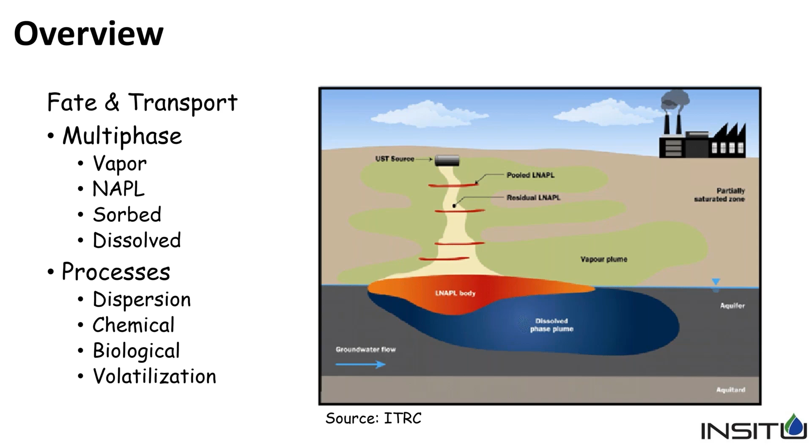Today we'll look at all 4 briefly at this site and how they were handled, but mostly focus on the dissolved phase. Things we have to think about when designing remedial programs, of course, are dispersion, chemical degradation, biological degradation, and volatilization if we have a lot of vadose zone to consider. One of the things you really need to understand when it comes to LNAPL and BTEX hydrocarbon plumes is the release of the LNAPL to the groundwater.

This is just once again from the ITRC and just shows how LNAPL, when it's released, how it accumulates at the water table and how you can have 3 different phases present. So if we go left to right here, basically you're having the LNAPL released, and then you're seeing the 3 phases form: the sorbed, the LNAPL itself, and then the water and the air.

So as it goes down, you get saturation of the soil with the LNAPL, and if you have enough, you get it accumulating on the water table. Now, over time, the LNAPL thickness will vary with the fluctuating water table, and what you get is, most people call it a smear zone forming. This can be very problematic from a remediation point of view, especially for deep remediation.

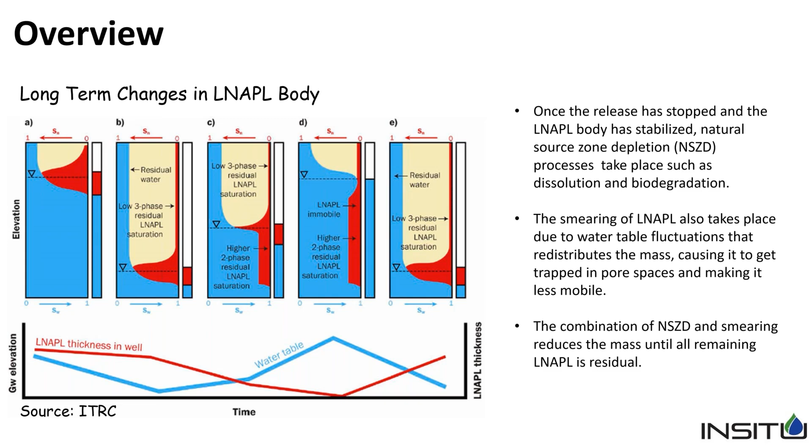So the other thing is how do we understand what we see in wells? Usually LNAPL is detected in wells. There are high resolution techniques out there like the UVOST and the technologies out there that can detect NAPL in the soil in the vadose zone, but usually NAPL is usually detected by presence in wells.

And how do you interpret that presence in wells with what you have to remediate? So you have to look at the different stages. We're not going to get into this, but it's something that when it comes to remediation, a lot of people forget some of these basic steps and understanding the conceptual model in the flow and transport of NAPL and the associated dissolved plumes, as well as the vadose zone plumes. So this is just a reminder, and once again, I strongly recommend you look at documents like the ITRC documents.

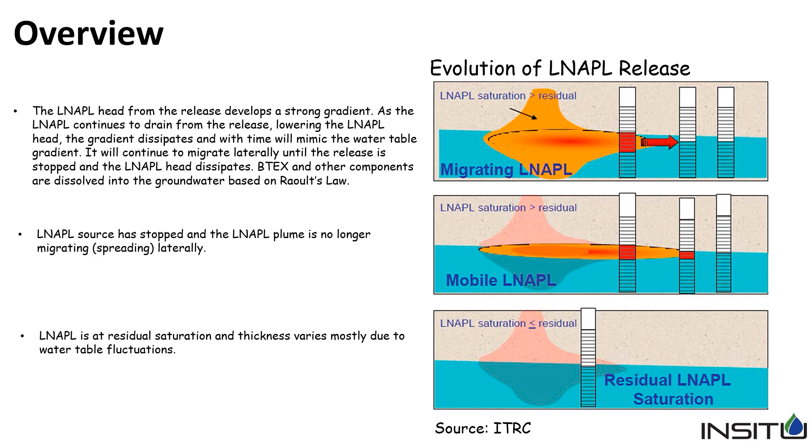So we'll get right into the site. It's an active gas station with multiple underground storage tanks. It has been in operation for over 30 years. And interestingly, the owner of the station does a leak test every so often. And the leak tests have always come back, quote unquote, passed, suggesting there's no leakage of the tanks. Unfortunately, somewhere along the line, the data in the LNAPL in the ground doesn't agree with the results of the leak testing.

So it's once again a little bit of a warning that leak testing do have, I call it, a detection limit, like most things. And that detection limit allows for a certain percentage of gasoline or diesel or hydrocarbons to be released without the system actually triggering any warning. So you need to be careful about that. And like most data, just take it with a grain of salt.

So the site itself is a 70-foot thick vadose zone consisting of sand to a very dense sand as you go down. Now it is heterogeneous with layers of higher hydraulic conductivity in that. So our hydraulic conductivity varies from about 1 times 10 to -3 to 9 times 10 to -4. So it's very quote unquote homogeneous.

However, these are bulk hydraulic conductivities and it doesn't really take into account finer or coarser grain or higher and lower conductivity sand seams or silt seams that may exist. It is a glacial fluvial deposit, so what we would call an esker. So it is fairly permeable and groundwater flows at a moderate velocity of about 30 feet per year. It is unconfined. As you would expect in a hydrocarbon plume, it is iron and sulfate reducing, and this aquifer is buffered quite well with carbonates.

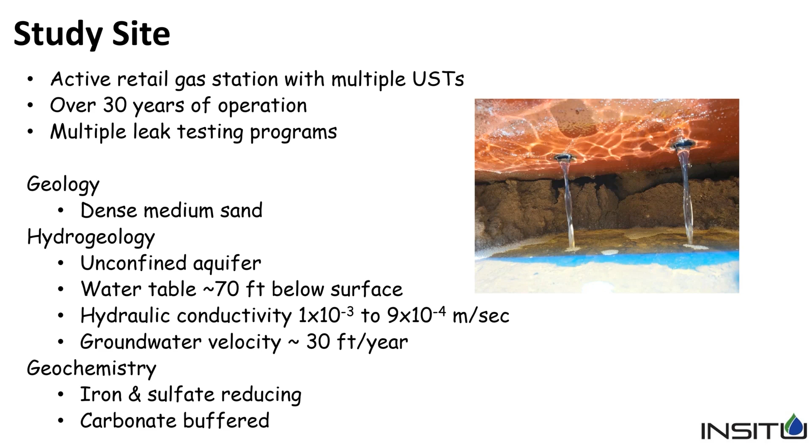Our chemistry, this sums it up now. This is the worst case chemistry for the hydrocarbons. And as you can guess, they're basically samples taken almost immediately down gradient of NAPL. So we have BTEX at about 122,000 micrograms per liter with the gas range 154,000 micrograms per liter, diesel range about 3,700 micrograms per liter.

And of course, we have some of the PAHs associated with this. We had a fair bit of naphthalene present. We'll talk about that a bit later as the University of Toronto PhD student there did a lot of research on looking at the naphthalene mobility at this site.

Inorganics, these are within the core of the plume itself. So really we have no electron acceptors in the core, which you would expect. We have very low iron in our core, which is a bit of a surprise, but this is a nice clean sand with very few iron deposits or iron coatings on the soil itself. So that's not surprising, but you'll see we do have some manganese hanging around.

Prior to remediation, we did have some methane occurring in the groundwater up to 1 milligram per liter, so fairly good concentrations. And as I said before, our groundwater is well buffered at about 6.8 to 7.2, which you would expect for carbonate buffered aquifers.

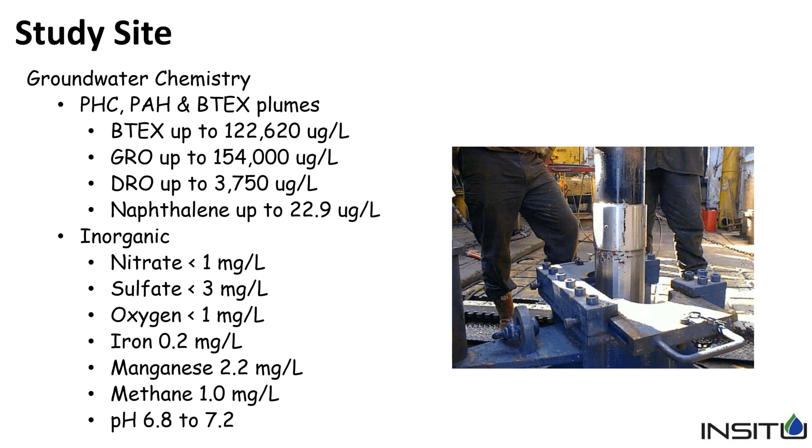So the site history itself is a bit interesting. Prior to us being involved, there was a pump and treat system put in. Not much is known about it. However, we do know it enlarged the smear zone significantly near where the system was.

We know groundwater fluctuates about a meter over the 10 years we've been working on site, and yes, you heard that right, 10 years. But the smear zone near where the pump and treat wells were was almost 3 to 4 meters. So they were doing some significant pumping, but they were smearing a lot of product. We're not quite sure what the objective was, because it really does not appear to have been effective in containing the plume, and it sure wasn't effective in reducing much mass of the plume.

So as we became more involved, there was an MPE system, a multi-phase extraction system, put in, and it removed about 9,500 kilograms of LNAPL. It did a fairly good job, but it got to a point of diminishing returns.

So the next technology brought in was an air sparge SVE system. Remember, we had 70 feet of vadose zone here, and most of that vadose zone was impacted underneath the tank. So we had significant mass within the vadose zone, as well as on the water table itself. Over that operation of about 8 years, they pulled out about 10,500 kilograms of hydrocarbons.

At the end of that, we had removed all the NAPL, except for one small area that had a little bit of NAPL. Access was a bit difficult for the SVE system, so we decided to do a surfactant push-pull flushing test at that area, to address the NAPL in the 1 or 2 wells that still had it.

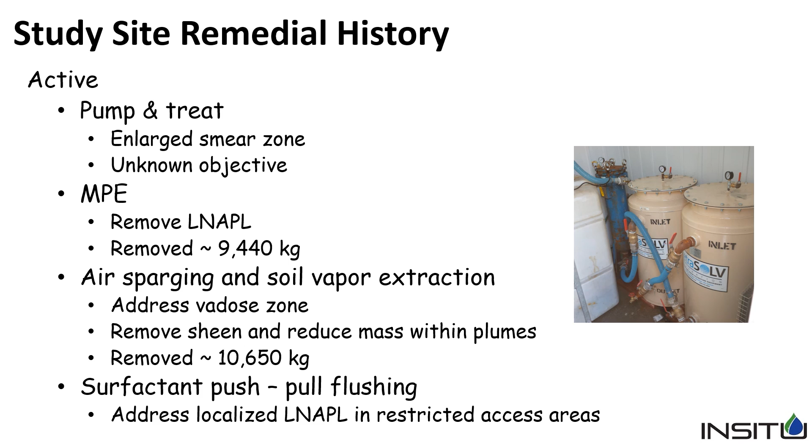And that was very successful in doing that. Basically, we injected a surfactant solution down the wells and then waited about 24 to 48 hours, and we pulled that surfactant-enhanced groundwater back and pumped it to the surface. After that was done, the NAPL was removed.

So we just didn't willy-nilly decide on what technologies to use and when to change them. We actually used an old concept put up by the EPA, probably back in the 90s, where we looked at the cost of contaminant removed on a mass basis and looked at it over time.

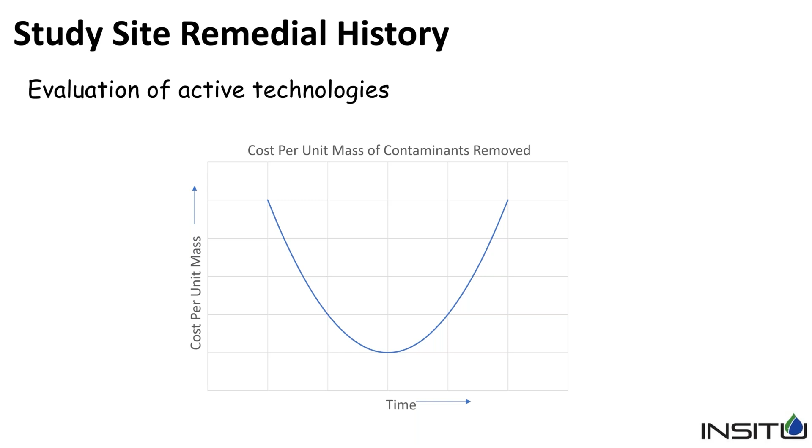What you'll see here is a kind of classic graph. Initially your cost is very expensive, and then as you get more and more efficient and remove more mass, your cost per unit mass decreases until it bottoms out. Then it usually starts to increase as diminishing returns happen. So usually we want to change the technologies, or reevaluate or optimize them, once we start to see that upward curve. This is kind of what we use as a basis for our decision making at the site.

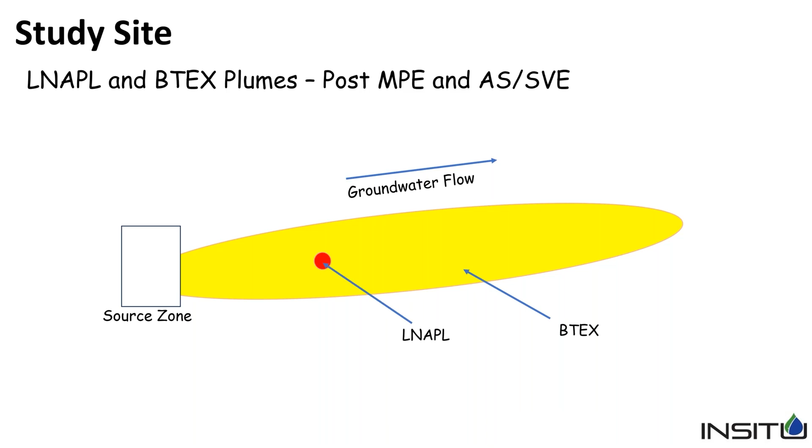So what we're left with was a large BTEX plume, about 400 feet long. At this point, we decided we would go to passive technologies. We looked at 3 different passive technologies. We used enhanced aerobic bio, which consists of using the Waterloo emitters, which release oxygen 24 hours a day, 365 days a year, through diffusion through a tube that's in the ground, and that oxygen diffuses into the groundwater, creating oxygenated water in that area.

It's very passive, but we used it as a plume containment technology. Basically, think of it as a PRB composed of Waterloo emitters. In areas of high dissolved phase, we decided to target those to try to knock down the mass of the hydrocarbons.

Using chemical oxidation, in this case we used activated persulfate or catalyzed persulfate in some cases. We used both, and what we want to do here is reduce the mass within the smear zone as well as within the plume.

Following that, we followed it up with the PetroFix colloidal activated carbon technology, and that was to go after the same areas and basically remove the petroleum hydrocarbon mass within the plume, as well as address any potential back diffusion and matrix diffusion reactions that could happen down the road.

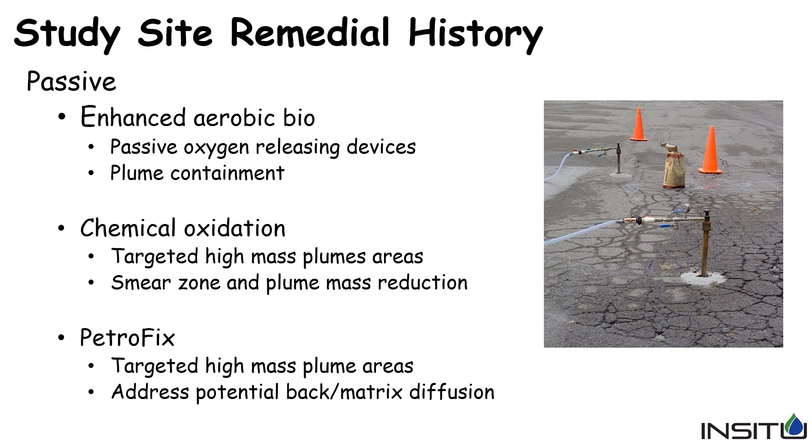So our objectives for the site were: first, evaluate and make sure the PetroFix can work on the high mass flux areas of the plume, the BTEX, the gas, and the diesel plumes, as well as look at the effectiveness of the PetroFix on back diffusion and matrix diffusion that we thought we may see over time, because we did have some fine materials within the overall aquifer.

And finally, and mostly what this talk is about, since we're dealing with high mass flux BTEX and other component plumes in some of these areas, we wanted to look at the effects on the lifespan of the PetroFix, because PetroFix, as Todd will talk about later, is an activated carbon technology that has finite sorption sites. So you could technically overwhelm the carbon if you have too high a mass flux on it over time.

So we wanted to look at what happens if we enhance that. Now, PetroFix already comes as a mixture, or you can customize it yourself, of electron acceptors, but we wanted to enhance those and add more electron acceptors to see if we could reduce the mass flux onto the carbon, and secondly, to see if we could speed up the kinetics of the reactions occurring right at the start, as most clients really want to see results very quickly. So we were looking at that to see if we could do that.

So we divided the site up into 4 field test areas. Each one's about 1,000 square feet in area, and we're targeting the water table and the smear zone.

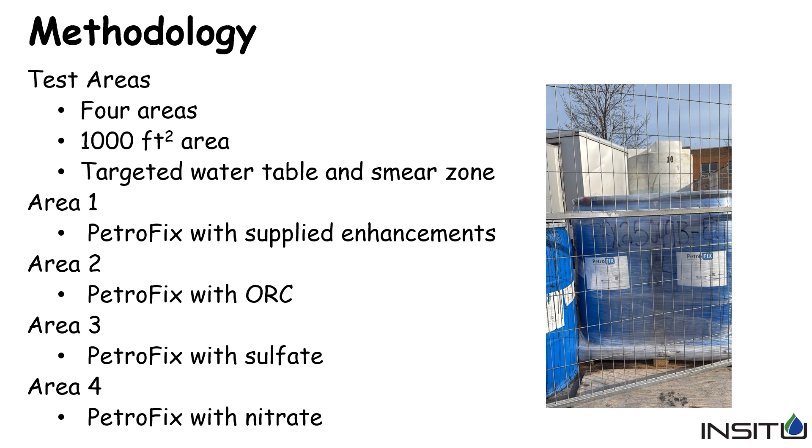This is a classic diagram, but one of the things we're obviously trying to do is enhance the biodegradation of the hydrocarbons, BTEX in particular. Most hydrocarbon plumes have these zones in them, so outside, where not affected, tend to be aerobic, maybe not, depending on the depth of the plume.

As you go through these classic stages of nitrate, iron, manganese reduction, then you get into sulfate reduction and then methanogenesis. Generally speaking, the degradation of the hydrocarbons, the kinetics, increases as it becomes more aerobic. So as you go left to right, those kinetics of hydrocarbon degradation speed up.

So in the ideal world, you would oxygenate most of your hydrocarbon plumes, and that would be great. Unfortunately, oxygen has a solubility limit, and it's consumed by a lot of other electron donors, and it tends to be more expensive on a per-mass basis. So there are different methods to go at it.

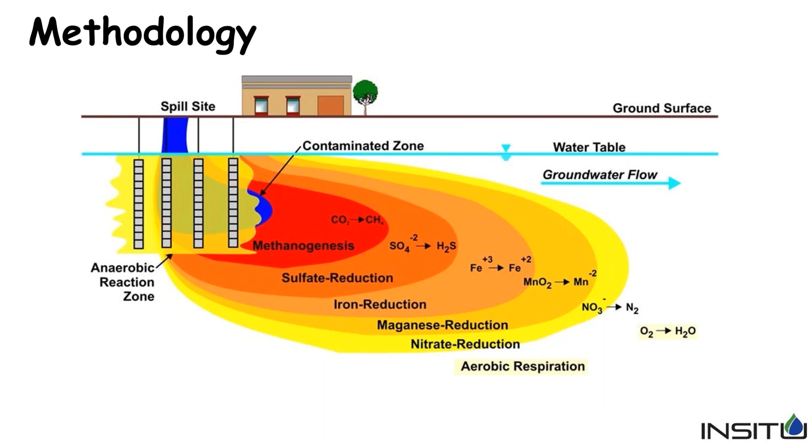So here's the thing of the 4 test areas. You'll see test area 1, where the PetroFix was used, was right near the source, but the LNAPL plume extended down to test area 2 and just stopped upgradient of test area 3. So all 3 of those areas had very high BTEX mass fluxes through it. In test area 4, there was a seam of high conductivity, and it also had a fairly high flux. So we picked these 4 test areas within the core of the plume to do the test.

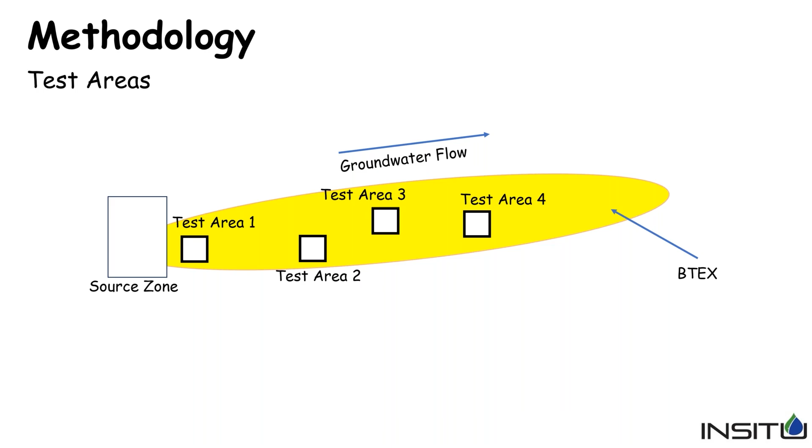So as I said, the first one was done with PetroFix with the Regenesis supplied nitrate sulfate electron acceptors. The PetroFix was injected using direct push technology. Area 2, the PetroFix was enhanced with oxygen releasing compound, and it was once again injected with direct push technology. Area 3 was with 2 forms of sulfate, calcium and sodium sulfate. It was injected in injection wells.

I'll be honest, I was sleeping on this day when I did this design, and we originally went out there with calcium sulfate in the form of gypsum. One of the things is the calcium, the divalent cations can actually - I won't say negatively react with the carrier fluid of the PetroFix, but it breaks it down. So you don't get the transport that you would if you're just using a monovalent cation such as sodium. So we originally started with calcium, and unfortunately we're getting some back pressure in the injection wells, and we switched over to sodium, and that solved the problem. So it's something you need to consider when you're doing design. A lot of people like to use gypsum, but it will potentially, depending on what use you have, negatively impact your distribution of your PetroFix.

Finally, we used a PetroFix with a nitrate salt, and it was injected using a combination of injection wells and direct push technology. You're probably asking why we used 2 different technologies. It's 70 feet deep. We had to get it to about 80 feet, and the dense sand was actually, in some cases, impossible for us to get that depth. So a lot of injection points we had to pre-drill, backfill with a bentonite mixture, and then go back and re-inject. So in some areas, we just decided to put injection wells in. And in one area, we used injection wells on an angle. So that's kind of why we did it.

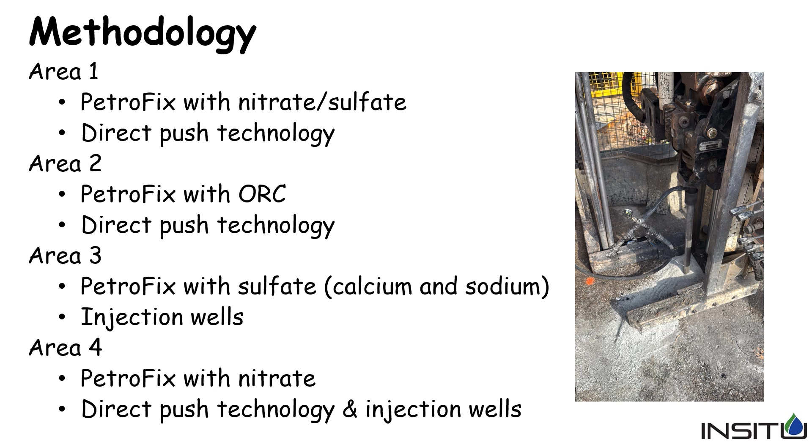So monitoring networks, we are looking at traditional monitoring wells as well as CMTs, which are a multi-level system developed by University of Waterloo, give you excellent vertical delineation of plumes and monitoring. We obviously did the classic organic analysis of gas, diesel range, as well as BTEX. We did a range of inorganic chemistry as well as carbon-specific isotopes, as well as detailed microbiology, which will show some results. And we did obviously water levels and LNAPL presence.

We also took cores of the soil in certain places to look at the modified total organic carbon. Basically allows us to look at concentration of activated carbon before and after injections. We also looked at the FOC of the aquifer - that was kind of a before number. And then we looked at visual cores. Anybody who hasn't used PetroFix or its cousin PlumeStop, both of those are very black, and they cover the aquifer solids very well, and they're very black when you do the injection. So they're visually very easy to actually see if you've injected in the areas you want.

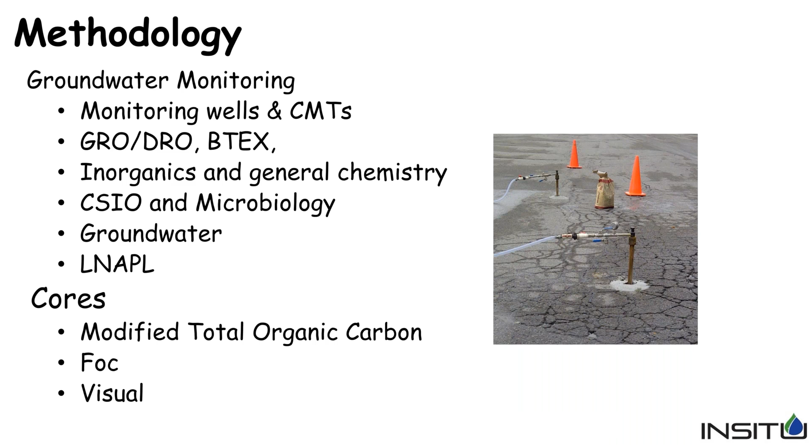So this is the results for area 1. This is PetroFix with its off-the-shelf electron acceptors added to it. Here the groundwater is flowing left to right. Water table, we have what I call a treatment zone here. And you can see this is post-injection. This is - I just picked xylenes. This is a cross-section of the concentrations going into the treatment zone, and then within the treatment zone, down gradient treatment zone. As you can see, we had a plume about 1,000, maybe a little higher, coming into the treatment zone of xylenes.

Basically, right within 30 to 50 centimeters of the up-gradient portion of the treatment zone, xylene went below our guideline, which was 5 micrograms per liter. We had some trace concentrations, but by the time we got out, well within our treatment area, and down gradient after a certain period, concentrations were basically all at detection limits.

We've seen similar results for all the BTEX compounds as well as the gasoline range. Diesel took a little longer to treat, as you would expect.

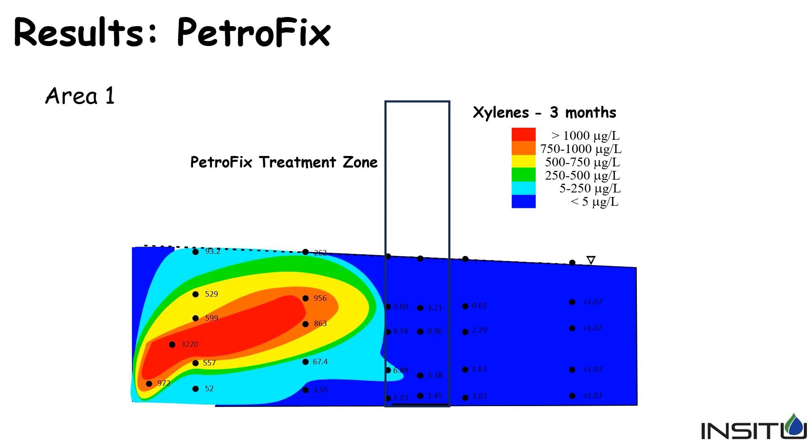When we look at treatment with time, you can see I put the different technologies used on the site following removal of the LNAPL. The air sparge SVE was put in about 17 months into the operation, and what we were seeing was a spike or rebound of the concentrations getting up to over 11,000 micrograms per liter BTEX.

So that's when we implemented the air sparge SVE, and we've seen a nice drop over time, but every time we turned off the system and let it sit for a bit, we would see rebound happening. The rebound was decreasing with time, but it wasn't decreasing fast enough.

So that's when we hit it with the chemox, in this case activated persulfate as well as catalyzed persulfate. We see a nice decrease, but once again over a 3 or 4 month period, we've seen a rebound basically back up to concentrations even greater.

That's when we decided to bring in the PetroFix. Over a 40-month period, we've seen the PetroFix take the concentration of BTEX down to below detection limits, and they've stayed there.

We did see a little blip there. We think that was due to a very high water table at one time that might have picked up something in the vadose zone that hadn't been addressed.

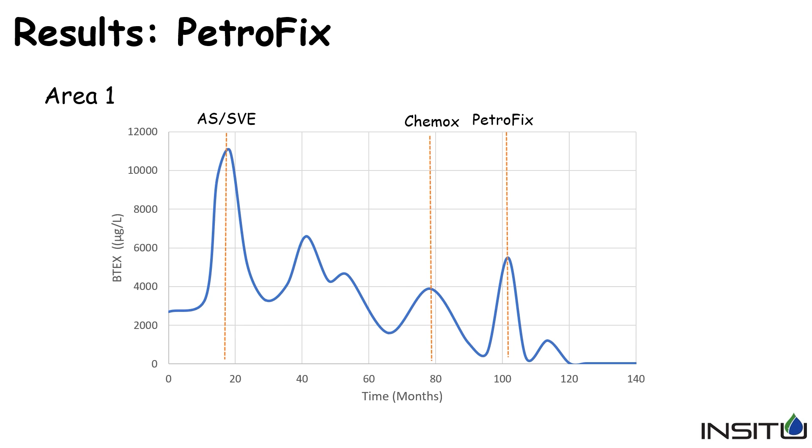For area 2, which is PetroFix with oxygen releasing compound added, here's a similar plot. I picked dissolved oxygen because we were actually adding ORC.

Oxygen coming into the treatment zone is pretty much near detection limit, except near the surface where we're getting oxygenated water through infiltration. Overall, concentrations are basically 3 milligrams per liter or less, and occasionally we see higher ones, which might be residue from the air sparge system that was there previously.

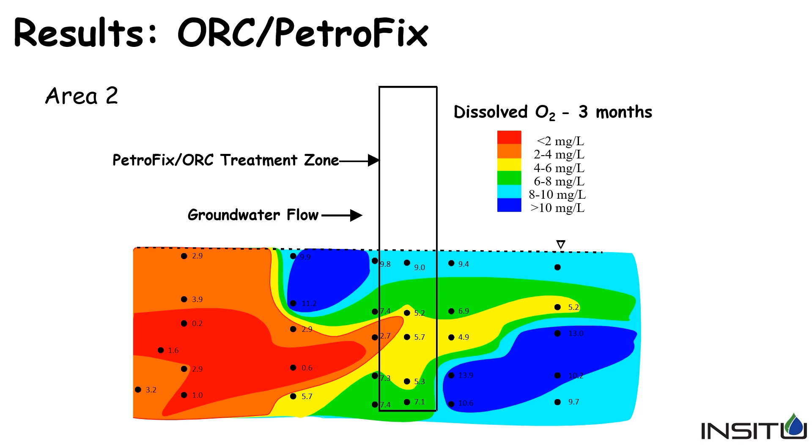Once again, this is just a plot showing treatment with time with the treatment technologies on there. Air sparge, once again, was good at knocking down the concentrations from about 5,300 down to less than 1,000, but then we had a rebound back up to about 2,000.

That's where we hit it with the catalyzed persulfate, and we've seen a decrease, about 50%, but then it bounced up again, similar to area 1, where the chemox rebound was greater than it actually was initially.

So that's when we went in with the PetroFix and ORC, and really the first sampling event after we hit the ORC was below detection limit, and it stayed at detection limit for the next basically 55 months.

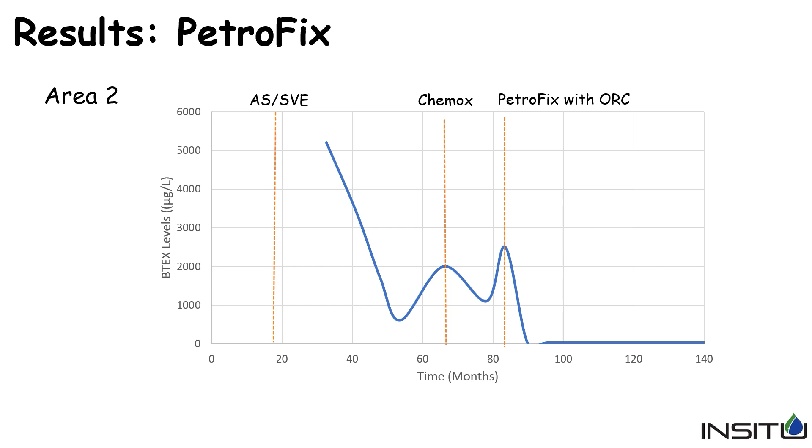So that was great. The ORC looked like it responded very quickly, and it has maintained its non-detect for over 3 years now. Once again, we did a similar type of microbiological analysis.

Once we get to area 3, this is where we added sulfate. Sulfate is a common additive for a lot of people because it has the advantage of very high solubility. It's slower reacting, and therefore it should last a lot longer than things like oxygen and nitrate within the ground. The downside of using sulfate is that it has limited compounds that will degrade or create conditions that allow biodegradation, as well as having a slower kinetic reaction compared to nitrate or oxygen.

So once again, we have the 3 technologies here, and you can see the same pattern. The air sparge knocked things down from about 15,000 down to about 3,000 micrograms per liter. Then we started to see a rebound again, so we hit it with chemox and it went down. But once again, we've seen that same type of rebound with the chemox that we've seen at the other 2 areas, where it came back up to greater concentrations - not much, but basically the same or greater than before the chemox. So in this case, we hit it with PetroFix as well as calcium/sodium sulfate.

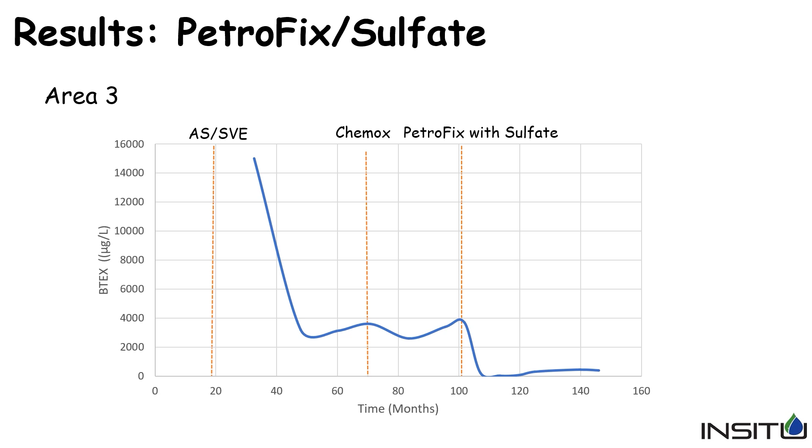In this area, we decided to do compound-specific isotope analysis to see if we could detect any signature of the sulfate reduction happening. We knew we had bacteria there doing it, but we thought maybe we could find that with the compound-specific isotope analysis. So we analyzed carbon and hydrogen.

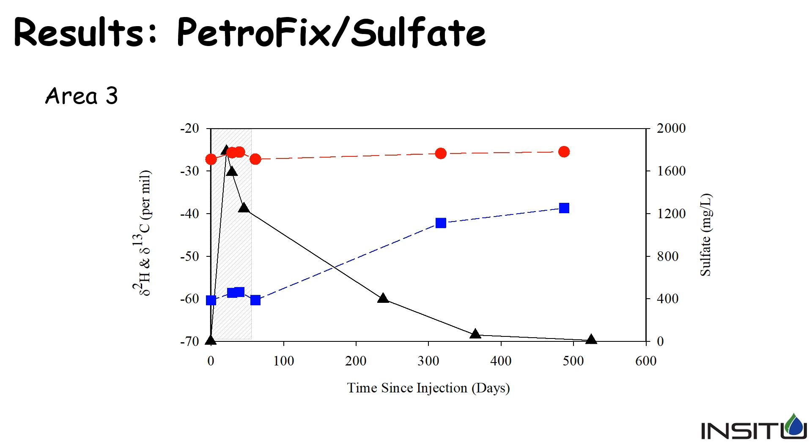What we've seen here, especially in the top 2 graphs, the red dots and the blue squares, is that the ratio between hydrogen and carbon increases with time, especially in the short term, suggesting that we do have sulfate reduction occurring. You also see that with the black dots over the short term, but then you see a rapid decrease in the ratio with time. We can talk about that, but won't get into too much detail today. As you can also see on the right axis, the concentration of sulfate decreases as we go with time, which is what you'd expect with sulfate reduction happening.

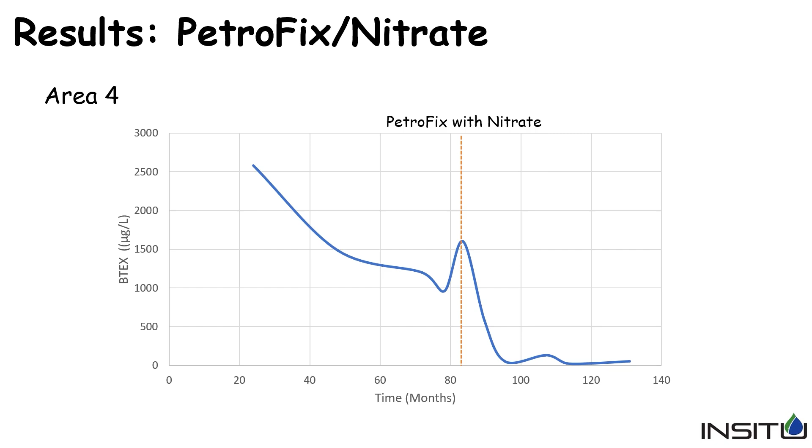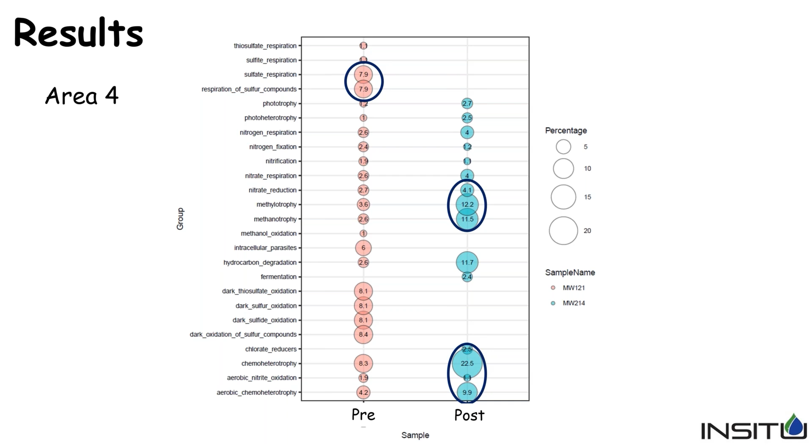Once again, we did the microbiology analysis, pre and post. You see a dramatic change in the microbiology community, with the denitrifiers and nitrate-related bacteria growing relative to the sulfur reducers that were happening before.

So in summary, we're talking about treatment efficiency. We looked at 6 months post-injection of PetroFix and its related electron acceptors, and 36 months, so short-term versus moderate term. Area 1 is just PetroFix with its regular electron acceptors.

After 6 months, we've seen 94% removal of the BTEX. After 36 months, we're basically below detection limit, so greater than 99.5% removal of the BTEX.

Area 2, which has the ORC, within 6 months had removal down to detection limits, and that's been retained for 36 months. For area 3, where we added sulfate, BTEX concentrations dropped to about 94%, and over 36 months it's been about 95%.

Then finally, the nitrate area, we've seen about 92% removal over the first 6 months, and then it increased its removal rate to basically down to detection limits, greater than 98%.

So what's this telling us in terms of kinetics? We did other calculations we don't have time to get into today, but it suggests the ORC with PetroFix had the fastest kinetics of all the supplements we added, and it's maintained its treatment efficiency over the 3 years now.

The PetroFix and the sulfate enhancement basically have the same kinetics at the start, but the PetroFix off-the-shelf additives actually had better removal over the long term than the sulfate. We think the sulfate just has slower kinetics, so as you go down gradient and the sulfate continues to react with the bacteria, you'll see higher reductions there.

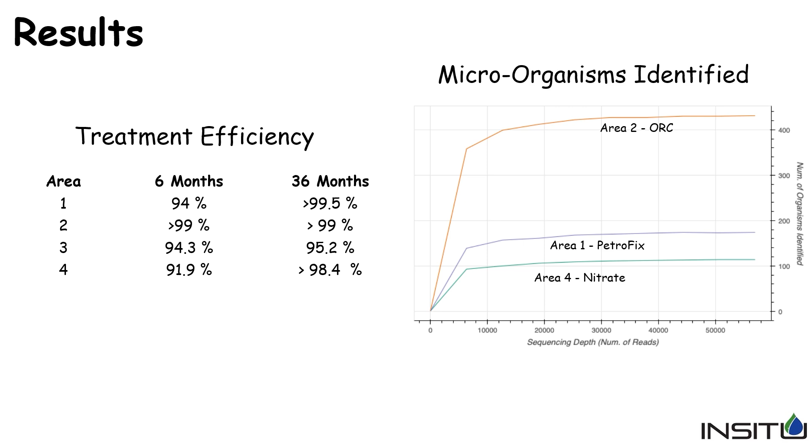So our findings, in summary, were that PetroFix could be injected effectively. I don't show the cores or results from the cores here, but if anybody wants to see them, we'll happily provide Regenesis with those and they can pass them on.

When we looked at the distribution, all 4 areas had very good distribution within the target injection zone. So it didn't really matter—the direct push was no better distributed than the wells, but overall the injection was very good for either technology.

As I said earlier, if you're using sulfate or nitrate and adding it yourself, you need to be careful using divalent cation salts due to their potentially negative reaction with the carrier fluid of the colloidal activated carbon.

All the mixtures modified the microorganism community in all 4 test areas, and very significantly. We've seen quick adaptation of the microorganisms, and they seem to be sustained over time. Most importantly, we had excellent treatment in all 4 areas over the short and moderate terms. We met the treatment objectives for the site in all 4 areas, and it's sustained itself for almost 3 to 4 years now. The populations basically reflect what we were injecting, so no surprise there, and that was good.

Kinetic data—I showed you some of the time things. We also looked at mass degradation with time based on results. It was pretty clear at the end of the day that ORC enhanced injection was the fastest of the 4 sites, followed by nitrate and PetroFix by itself, which showed kind of the same rates. The sulfate was the slower one. That said, the sulfate one with enhanced sulfate still has sulfate present, so it might have a longer lifespan than the other 3 areas.

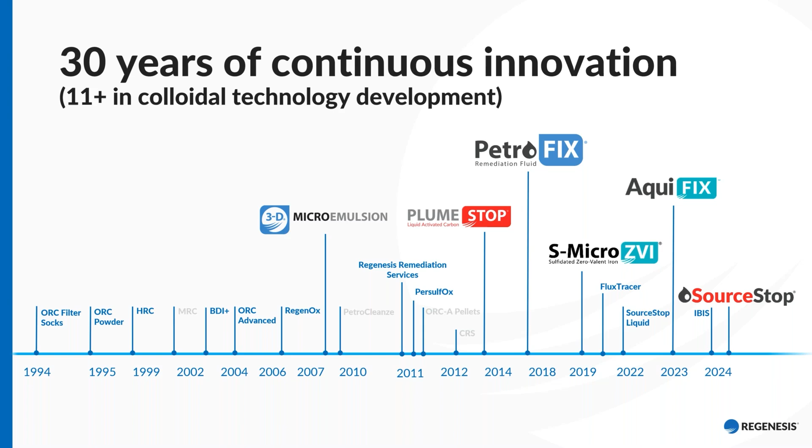Colloidal technologies are very small. They allow us to put our technologies into the subsurface using low pressure to get homogeneous distribution. We've developed about 6 or 7 of these over the past 11 years, used for a variety of different contaminants. Today we're talking about PetroFix, but they can also be used for adsorption for PFAS, for CVOCs, and other types of contaminants. What's special about a colloid is that it's stable when shipped, stable when mixed, and when we dilute it, it's a material that has low viscosity. It's easy to go into a well or down a rod.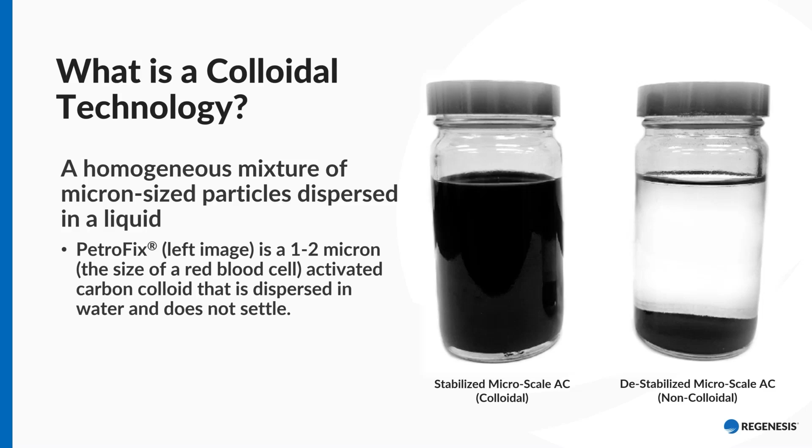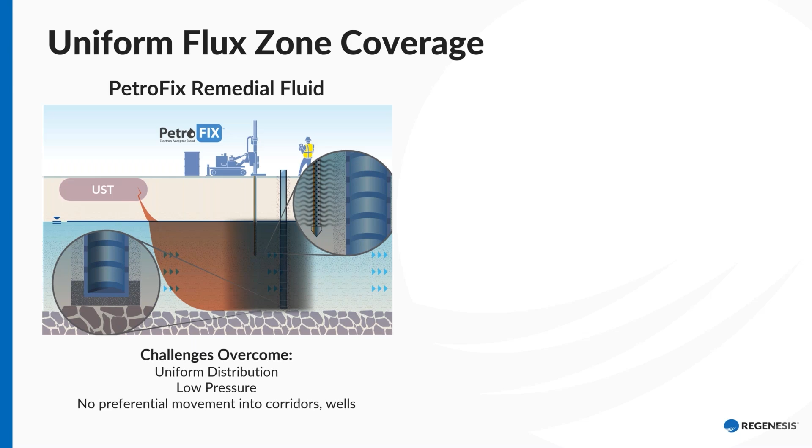In comparison, a destabilized microscale non-colloidal material like powdered activated carbon will settle, and those materials, as I'm sure Rick would attest to, can be a little bit harder to get into the ground—you need higher pressure. This colloidal homogeneous mixture of micron-sized particles allows us to go into the subsurface, and I like to call it floor-to-ceiling coverage of an aquifer, without really worrying about fracking or high pressure moving out of the source area or into a corridor or well. Most other materials—even Rick mentioned oxygen release compound advanced—take a little pressure, and that tends to have sometimes a bit of fractured flow depending on how you put it in. But it helps us overcome some of the challenges with fractures, gaps between fractures, and possibly utility corridors.

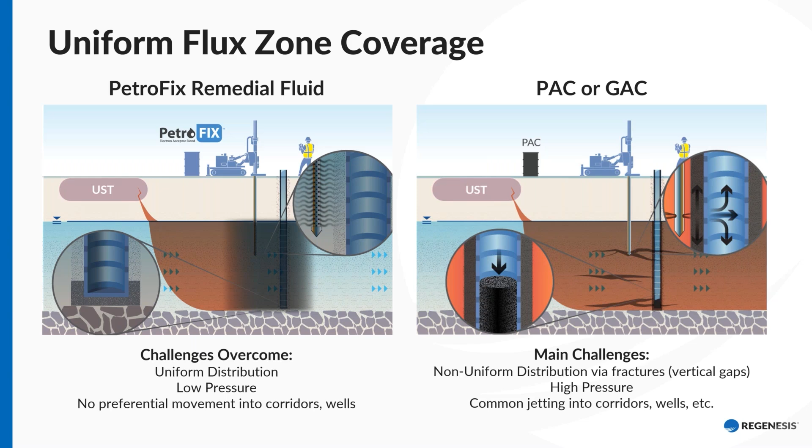These are some of the big benefits of all those 7 or 8 colloidal technologies, including PetroFix. So it ships to the site as plus 30% by weight colloidal activated carbon. The package that Rick mentioned is a sulfate nitrate combination that comes in separate buckets and is put into the mix tank before it goes down the rod or into the well.

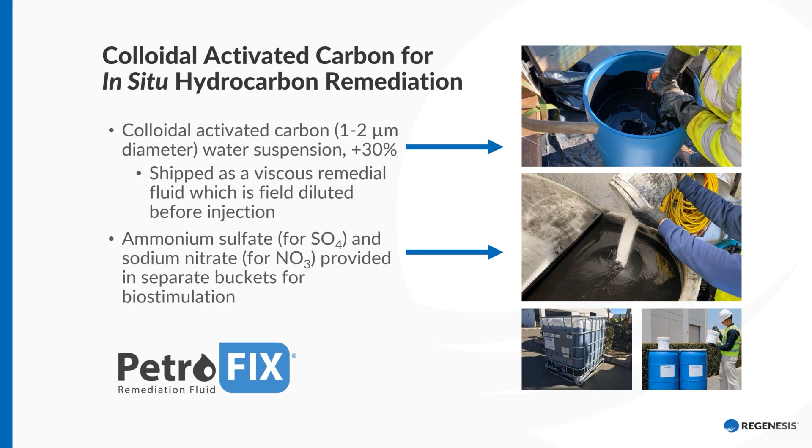The reason we do that, and I think Rick did a really nice job explaining this, is it's really just promoting biodegradation. Specifically, the PetroFix turns the soils black, as Rick mentioned, but the PetroFix itself doesn't clog an aquifer. What it does is coat the aquifer in a very small, thin layer.

The sand particle image on the left, taken with a microscope, shows the PetroFix particles adhered to that sand. Once it's adhered, it forms a thin adsorption layer. Contaminants go onto that, and when you add electron acceptors, biofilms grow. Those biofilms are in close contact with the carbon, and you get biodegradation and regeneration of the site.

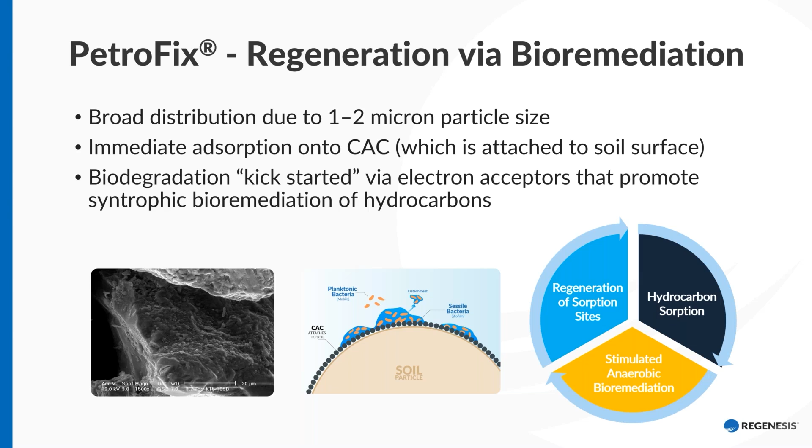As Rick said, nitrate is very good for, say, benzene. It's got a broader range of treatment capabilities. Sulfate is the slowest, but it's still versatile. I would say if we had a soluble form of oxygen, we'd love to do that, but that's hard for most people—we don't have that.

We do have oxygen release compound advanced, but that can be difficult to co-inject. It takes a little bit of skill to do that, and generally we avoid it. Somebody like Rick can do that, but we prefer to do a nitrate sulfate combo as a standard package.

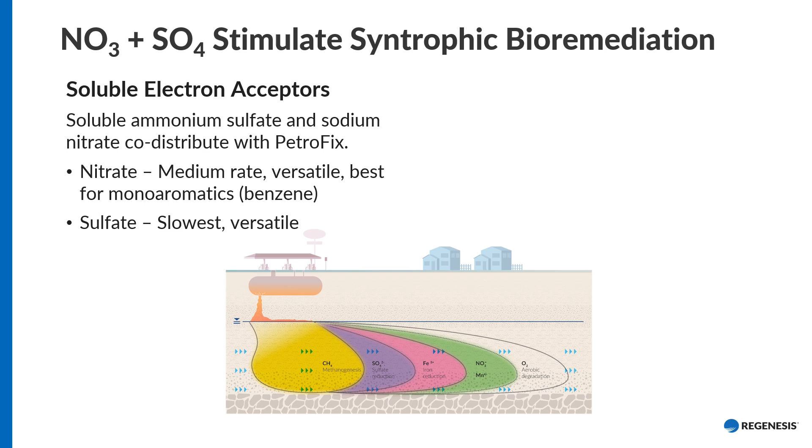There's been a lot of research over the last 10 years or so, some papers actually going back about 20 years now, showing that when you use combinations of electron acceptors... and I'm going to go out on a limb here, watching Rick's presentation, it seems that in the long run, the PetroFix nitrate sulfate package is holding its own at 3 years.

One of the neat things is that with biodegradation, things tend to stall out when you run out of electron acceptors. One of the things that stalls is fermentation. Fermentation and methanogenesis are actually some of the heavy lifters for bioremediation, but there's waste that accumulates, in the form of hydrogen and acetate.

When you add electron acceptors like nitrate and sulfate, they kickstart biomass formation, and these wastes start to get removed from the system, which kickstarts syntrophs. Now, syntrophs are a type of fermentative bacteria that are dependent on other bacteria to live and thrive. So when you have these nitrate reducers and sulfate reducers going, you start to get this engine rolling, and then methanogens kick in.

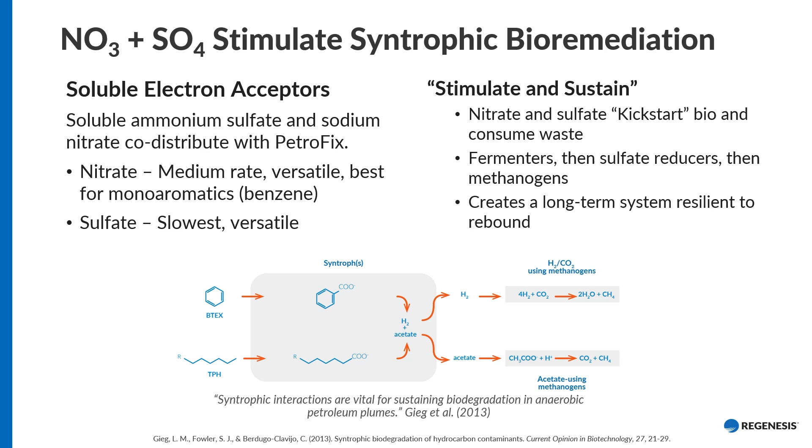They start to convert hydrogen or acetate into other byproducts such as water and methane, or carbon dioxide and methane. The point is that this phenomenon really allows contaminants to be biodegraded even after the presence of nitrate and sulfate is no longer detected.

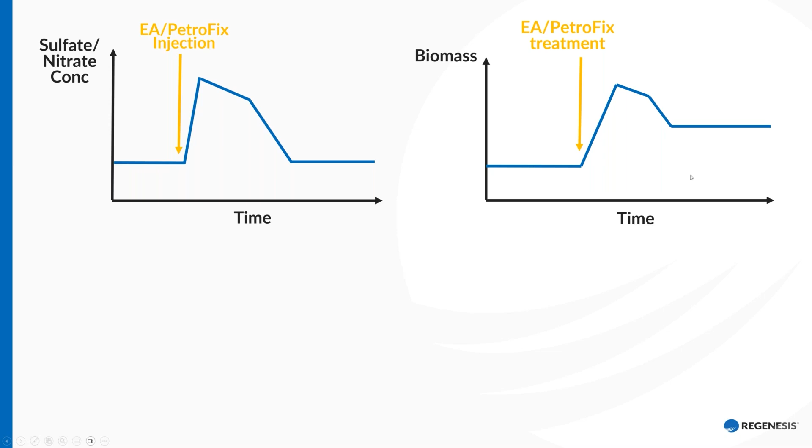Theoretically, when we add sulfate nitrate, as Rick showed, it comes up and then goes down and away. What you'd expect to see is biomass go up, maybe back to background over time, or maybe stabilize—he was showing total microbial populations. This is a site in Indiana where we saw similar curves to what Rick was showing.

We saw nitrate or sulfate go up and then come down. This little blip was actually from an injection adjacent to it, where they started to get some bleed-in of nitrate and sulfate. But in terms of biomass growth, we did do some advanced diagnostics, like Rick was showing, from a company called Microbial Insights, specifically using a tool called the QuantArray Petro.

And we took that data, and then I boiled it down and just took 3 of the targets out there. I'm looking at total Eubacteria, sulfate reducing bacteria, and PM1 bacteria responsible for MTBE degradation.

Notice that the total Eubacteria, which is a total estimate of all the populations of bacteria, doesn't distinguish between sulfate reducers, fermenting bacteria, et cetera, but it goes up even after the electron acceptors were depleted in November. They continue to go up.

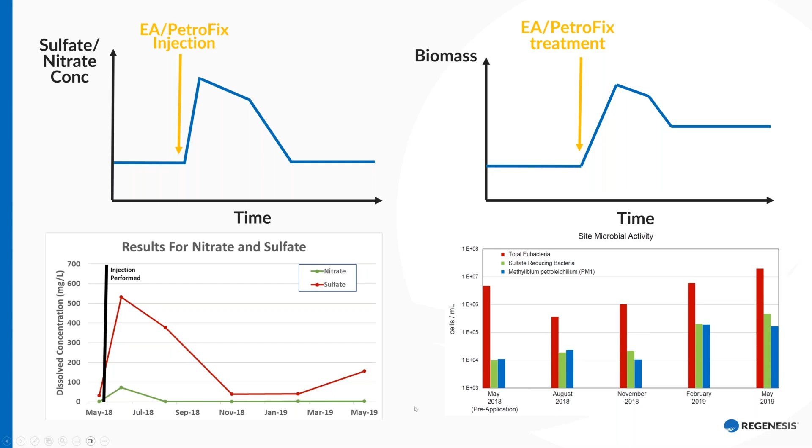And so if we look at that, we see methane generation continue. We don't have carbon dioxide data, but you would see higher levels of that over time, roughly about 2 times over baseline. And so we know over the long term that we get some of this syntrophic fermentation, methanogenesis cycle.

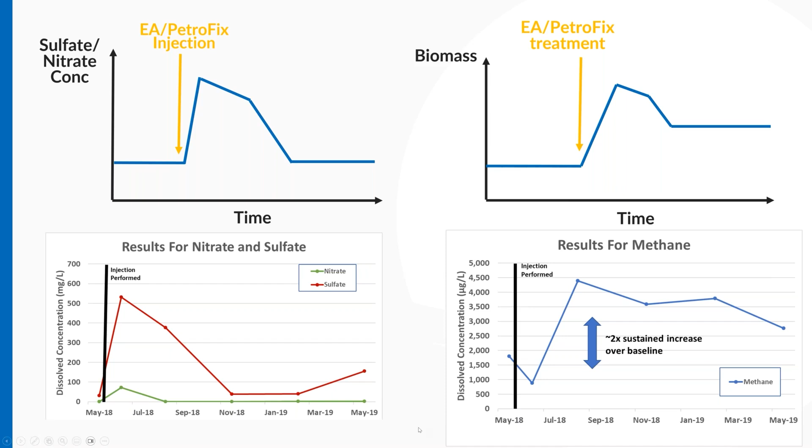So I think that's a couple of the neat things on using nitrate and sulfate together, and that can be seen more in a tech bulletin that we have. It can be found on our website.

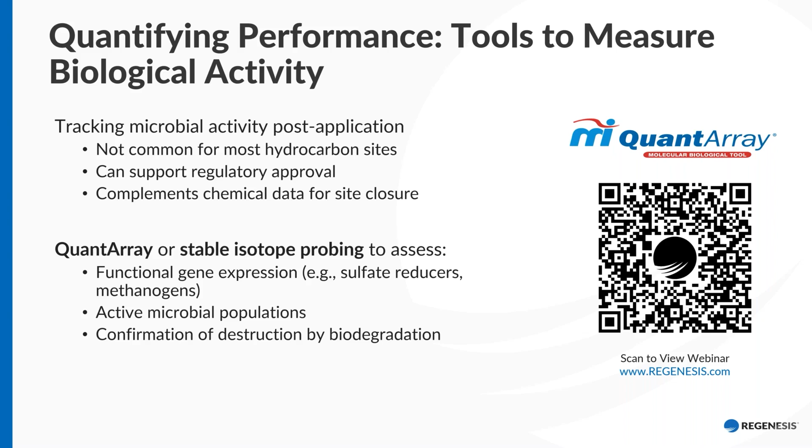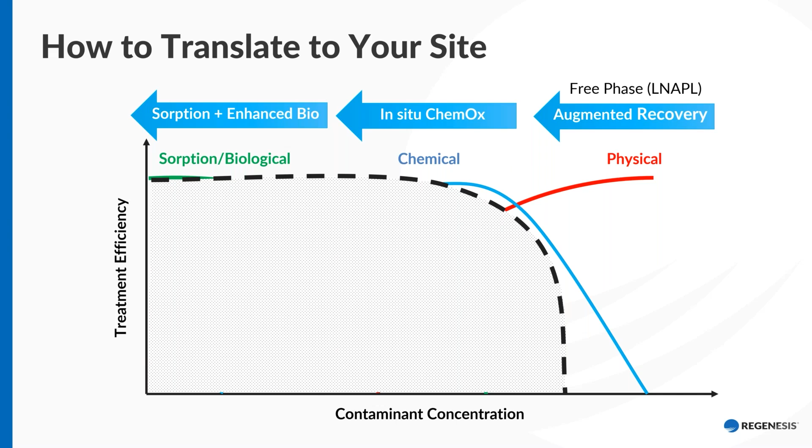So you saw Rick in his case studies, his research, have sites that use air sparging, ISCO, and ISCO in particular. Typically, people will transition from physical or ISCO into something like a PetroFix, but what we're finding with his site with high mass is it might actually be possible at times to rely on PetroFix instead of an ISCO application to handle what you need to handle.

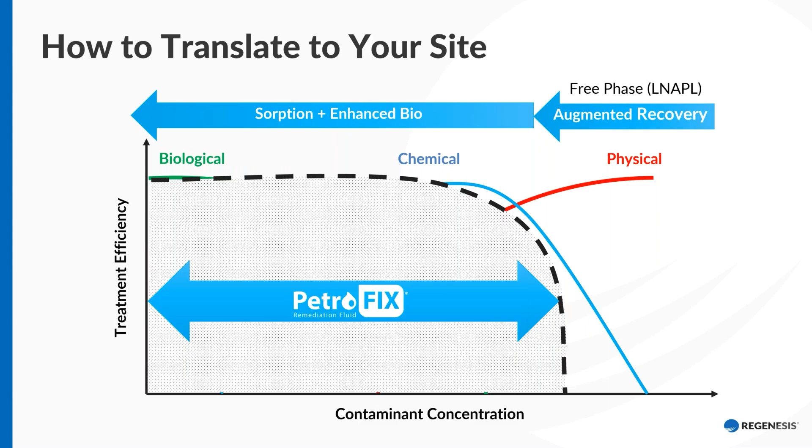Now, that could be you have high concentrations and maybe you don't have to get down to 1 part per billion, but it could be a risk-based type of closure, like something that I'm going to show you next on a site. So we have a site here that was done on the East Coast.

This was a site historically utilized as a retail service station. The reason I picked this site is it's fairly recent. We actually just published this a couple months ago. It has high mass and it has an integrated use, in this case with an ISCO product that we have, called RegenOx.

The site itself, this is the former gas station building. We're down to the pad, and what you see here is the former tank basins here in green. So we're looking across from this lower angle over here off in this direction and across towards the equipment being used to do some of the injections.

The fueling pads were right here, and there was a lot of free product, a lot of contamination, very, very high, that was in here. I believe if you add it together, it was probably above 50 milligrams per liter.

The goal was to eliminate measurable LNAPL in this well MW11 right here, to get benzene below 29, toluene below 7,300 parts per billion, and EDB below 0.05. We don't have a lot of fancy biological data on this site, but more just the chemical results.

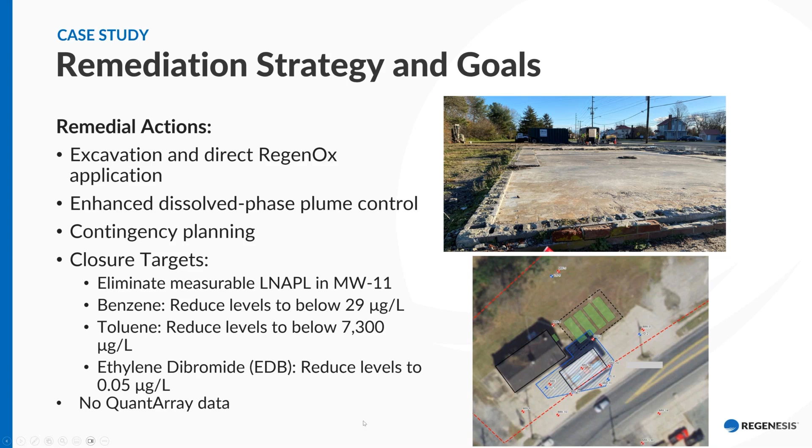So in terms of implementing it, PetroFix is versatile in that it can be sprayed easily for excavations, it can be injected. I've seen it used for inland spill response. I've seen people use it for tank basin flooding. It's compatible with infrastructure. In this case, contamination was so high, they opted to use excavation here.

And then we came in and we sprayed RegenOx into the base of this excavation, which went down to about 13 feet. And that was a primary method for them to try to get rid of a majority of the smear phase LNAPL that was at the site.

But going deeper than that was pretty expensive, and they decided that they were going to backfill and come in. And we actually did a pretty heavy dose of PetroFix and a lot of electron acceptor blend from 13 to 16 feet below the ground surface.

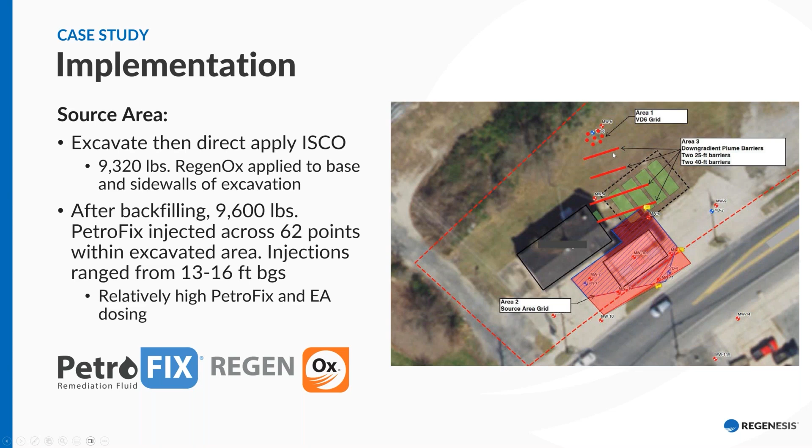Then we implemented a series of barriers to truncate and stop the movement of the plume going off site, and a little bit of a grid at the far down gradient well. We used a total of 13,600 pounds of PetroFix and 52 points for these barriers, and about 1,200 pounds of PetroFix down gradient. The site, by the way, was a sandy site primarily with intermittent layers of silty sand and clay sand.

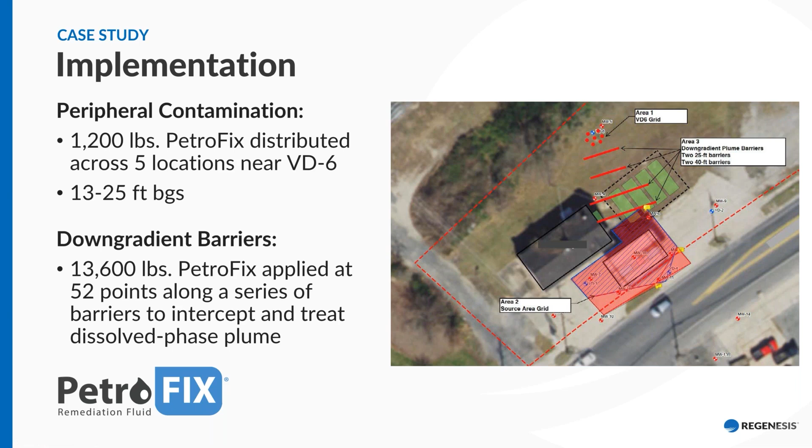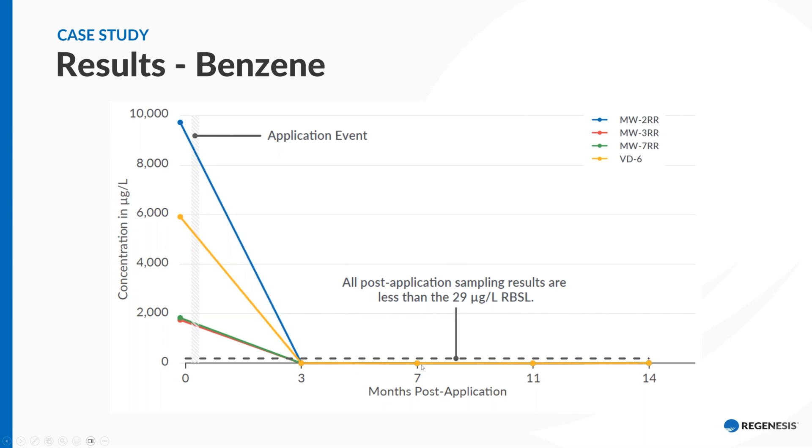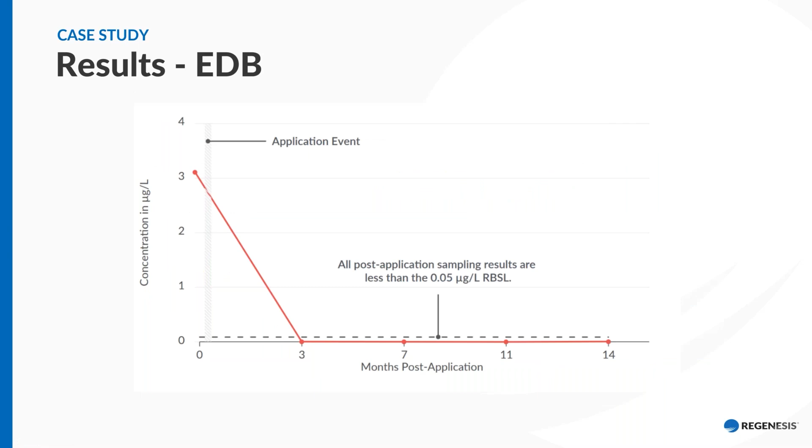First quarter post application, we see all the wells on site dropping well below the 29 ppb RBSL or closure limit needed for the site, actually hitting non-detection, very low limits. We also see the same for other BTEX compounds such as toluene—7,300 was the target, but we're getting all the way down to detection limits. And even EDB is doing extremely well. So in conclusion, benzene, toluene, and EDB all hit their limits.

LNAPL removal achieved and sustained—not being observed any further at the site, which was one of the goals. We hope to see further results from this come out, and to be able to issue this as a site closure report or a case study.

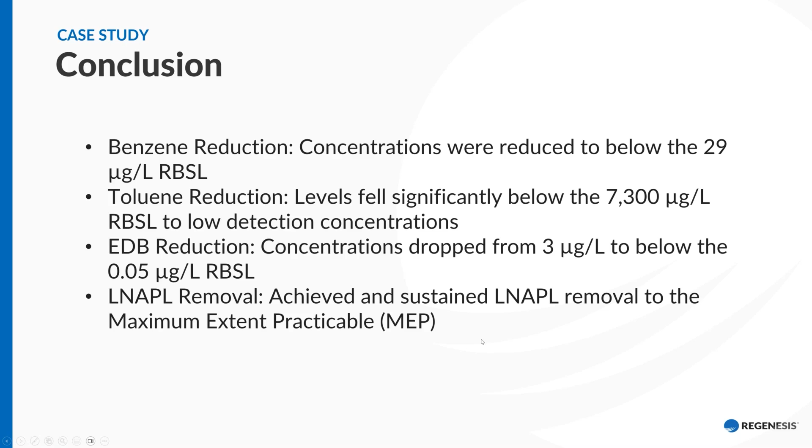So with that, going through it fairly quickly to keep it on time, why don't we transition over to Q&A?